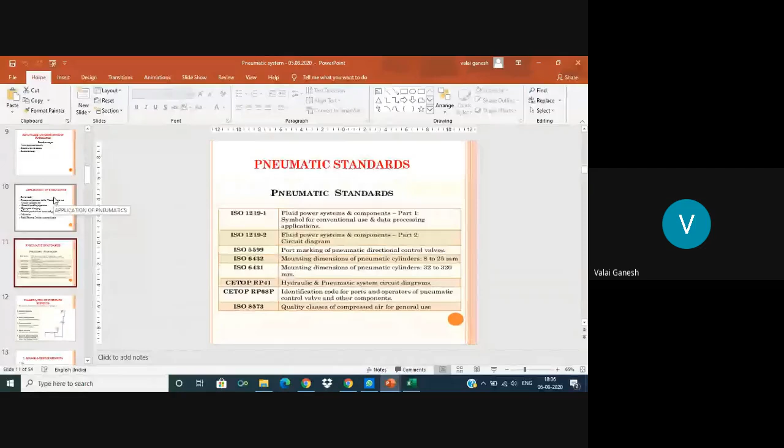So there are a lot of inherent advantages of hydraulics also. We can't simply compare pneumatics and hydraulics. There are a lot of parameters available. Based upon the parameters only, we can conclude which one is better. Okay. Since my topic is limited to pneumatics, I'm only focusing on pneumatics alone.

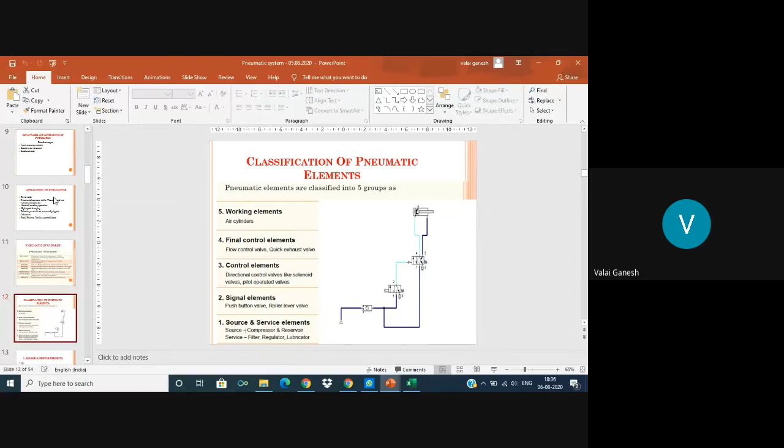To build any pneumatic circuit, these are the 5 basic components required. One is the source or service element. Source is nothing but air. Air is taken from the atmosphere, and that should be compressed properly in order to build some pressure. In order to compress the air, we require a compressor.

We can't directly send the air into our system because air is taken from the atmosphere. Sometimes it has some pollutant particles that should be removed properly. That action could be done with the help of a filter, and we are adjusting our pressure also by tuning the pressure with the help of a regulator.

And compressed air is sent to the system, where if pressure increases, temperature also indirectly increases. We don't require any hot air in our system. We require only pressurized air. For that, we use lubrication for minimizing the temperature in the system.

And the second one is the signal element. This is called the signal element: push button valve, roller lever valve. So this is the push button valve. Okay. And the third one is the control element. This is called a direction control valve. 3x2 direction control valve, and this is called a 4x2 direction control valve, where the activation is based upon pilot. Here the activation is based upon push button.

Okay. And the fourth, the final control valve, that is the flow control valve or quick exhaust valve, is not indicated in this picture. And the fifth one is the working element. Working element is nothing but our actuator. As far as pneumatics is concerned, in most cases the actuator may be a linear one. Linear means it will move left to right or top to bottom. Only straight action. There is no rotary motion involved in this.

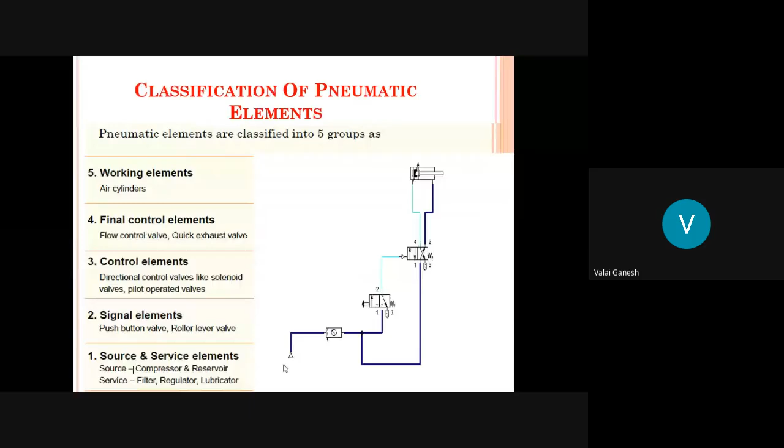The one and only difference is there we don't require a compressor. Instead of a compressor, we are going to place a pumping unit, pump with the motor setup, because oil is incompressible. There we are going to use liquid fluid; in most cases we are using oil. Oil is incompressible in nature, so we can't compress the oil. Instead of a compressor, we use a pumping unit, pump with the motor. Okay, so sir discussed all those things very clearly and precisely in the last class.

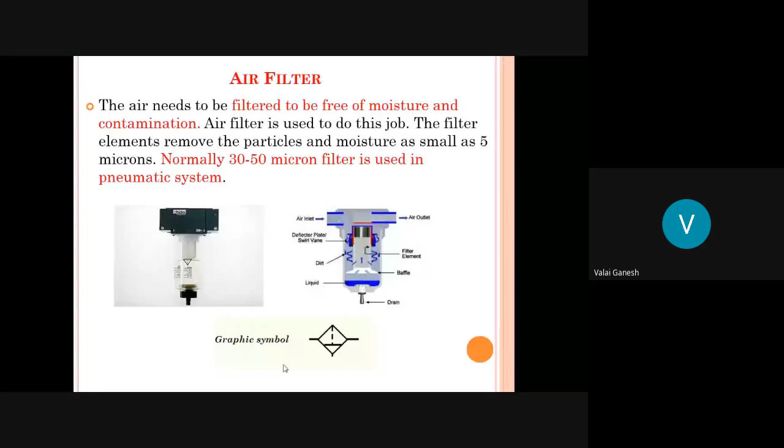The only takeaway from the last class, the one and only most important thing, is you need to know the symbol, the graphical representation of each and every symbol. Then only you will be able to do some kind of automation. These symbols are universally accepted. That means wherever you go, you may find the same symbol. There is no change as far as symbolic representation is concerned. Okay. These are all the various components along with the symbols.

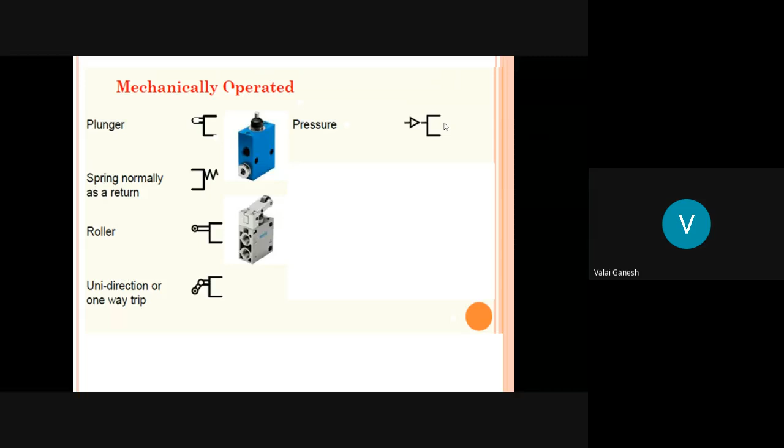Instead of manually operated, we have certain kinds of joints and linkages. So the first one is plunger, second one is spring return, third one is roller, fourth one is unidirectional or one-way trip. This is called idle return, roller with idle return. And this is the most important case for you. Whenever you find this triangle pointing towards the right hand side or left hand side direction, it is called a pilot signal. Pilot signal means air is used to change the direction of the direction control valve instead of a human.

This is solenoid direct and this is called solenoid pilot. Whenever you see that filled triangle, that refers to pilot. This is combined pilot as well as solenoid. Whenever you pass the air into the system, it will automatically change the direction. Or whenever you apply some current into the system, the valve direction also changes. The primary purpose of those terminologies is to change the direction of the direction control valve.

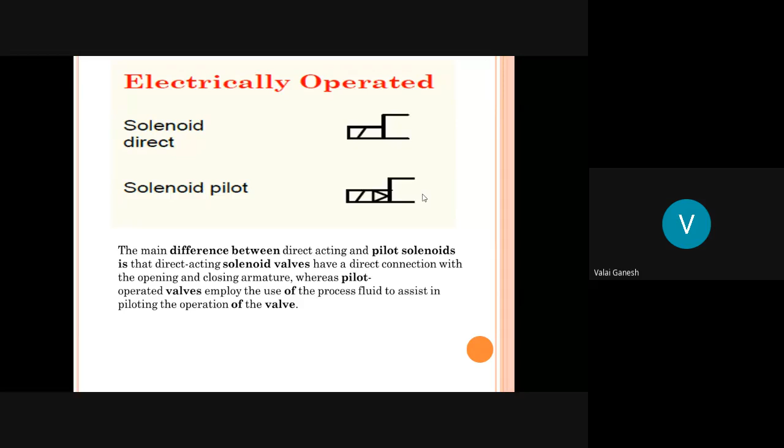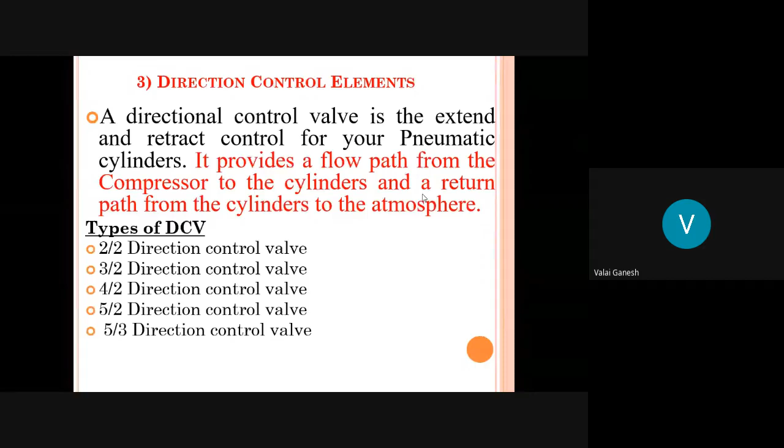Yes. So direction control valves are normally designated by these parameters. It looks like a fraction, with the numerator having one value and the denominator having one value. Normally the denominator represents the number of square boxes. So if it is 2 square boxes, it contains 2 positions. That is indicated at the denominator. Okay. The numerator has the number of ports.

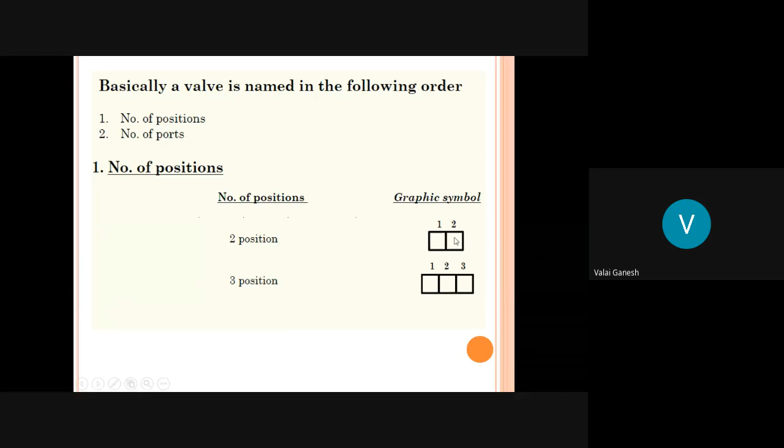Suppose you have 3 square boxes in your direction control valve, it contains 3 positions. One is for left side activation, another one is for right side activation, and the central one is for neutral position. Okay, so inside the square boxes you may have some ports, that is 1 to 2. This is the opening passage. So 1 to 2. So it is said to be a 2 by 1 direction control valve. Why is it called a 2 by 1 direction control valve?

It contains 2 ports. The ports are normally designated as the numerator of the valve, and the number of square brackets is designated as the denominator of the valve. Okay, this is a 2 by 1 direction control valve. It contains 2 ports and only one direction. Okay, so this is called 3 by 1. This is called 4 by 1. And this is called 5 by 1.

Whenever you find the symbol T, T stands for terminal, temporarily locked. We can't send the air further beyond this position. Okay. Yes. So with the help of this, we can designate this valve. This is called a 5x2 direction control valve. Why is it called a 5x2 direction control valve?

So it contains two square brackets, so the two is automatically designated as the denominator. In the numerator, it contains 5 ports. This is port number 1, this is port number 2, this is port number 3, this is port number 4, and this is port number 5. One square having 5 ports means similarly you get the same 5 ports on the other square bracket, but their positions are changed. Okay, in order to have different kinds of activation, the positions are changed. Okay.

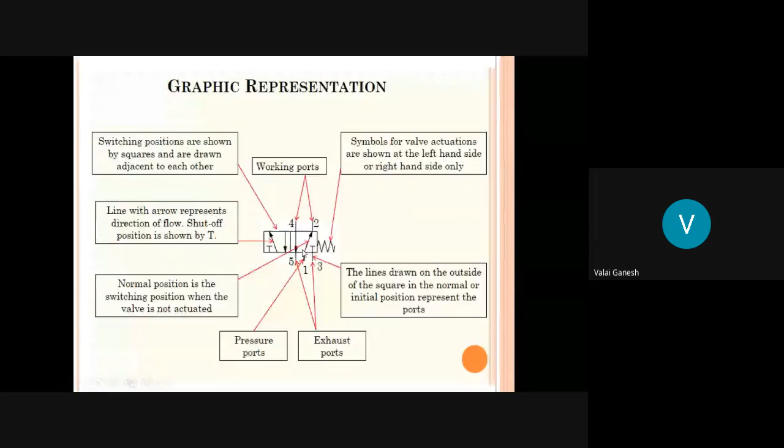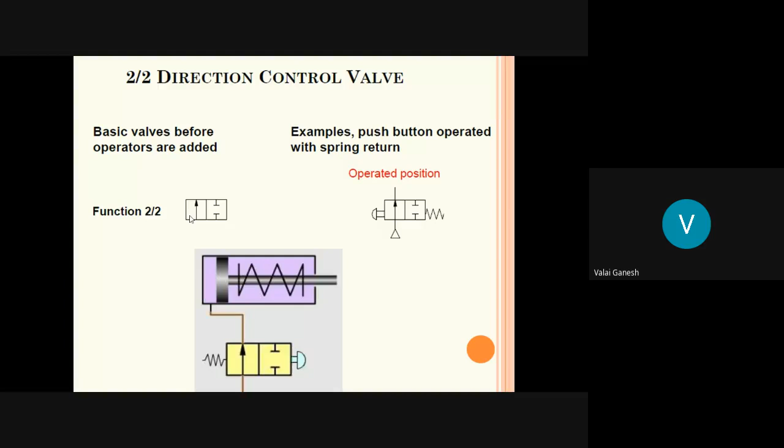So this is a 2x2 direction control valve. This is called a shut-off valve. Normally, it is called a shut-off valve. This is called a shut-off valve, where you can normally employ this kind of valve in your home, where taking liquid from the bottom, and you are going to take the liquid from the bottom position to the top position. You normally use this kind of valve. Okay.

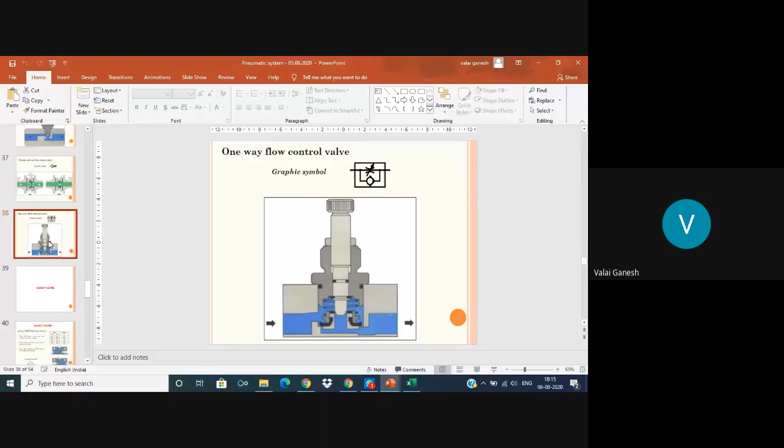Okay. So these are all the things already discussed in the last class. My intention is to explain those things only. Now I move on to today's presentation. Yesterday's presentation was only focusing on the pneumatic system, its components and ISO symbols.

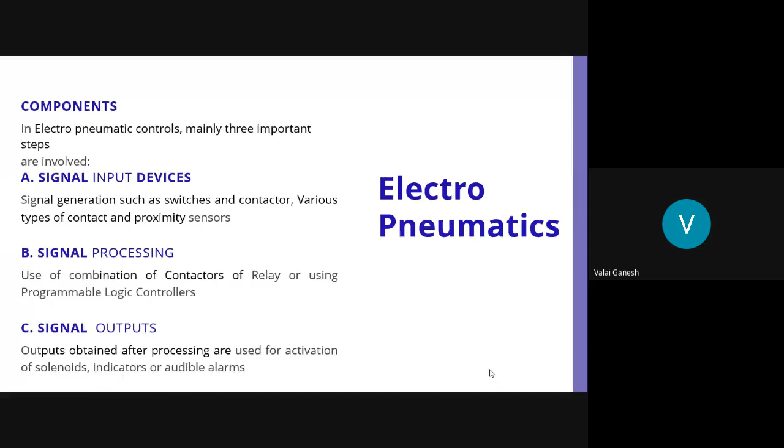Okay. And the third one is signal output. The output device may be a solenoid, or it may be an indicator, or it may be a buzzer or alarm. So these are the three main components of electro-pneumatics: input element, processing element, and output element. Okay. So in most cases, we are using these kinds of components in our system. The first one is manually activated push button switches. Manually activated push button switches, as the name suggests, work only with the help of human input.

If the switch is open, whenever you press the switch, it will be able to close, as you turn on or turn off the switch in your home application. The second one is called a limit switch.

As the name suggests, this limit switch is used to limit the displacement of the actuator. This limit switch is used to adjust the displacement of the actuator. The actuator may be a single acting cylinder or a double acting cylinder. For example, a double acting cylinder has a stroke length of 200 millimeter. That means whenever you supply air into the actuator, it tries to move 200 mm from its position.

In order to limit its position, for example, I require only 100 millimeter displacement. In that case, I'm going to place a limit switch so that the distance between the limit switch and the actuator is 100 mm, so that whenever my piston reaches 100 millimeter, this switch is able to give the alarm, or give the signal to proceed with further operation. So this is called a limit switch.

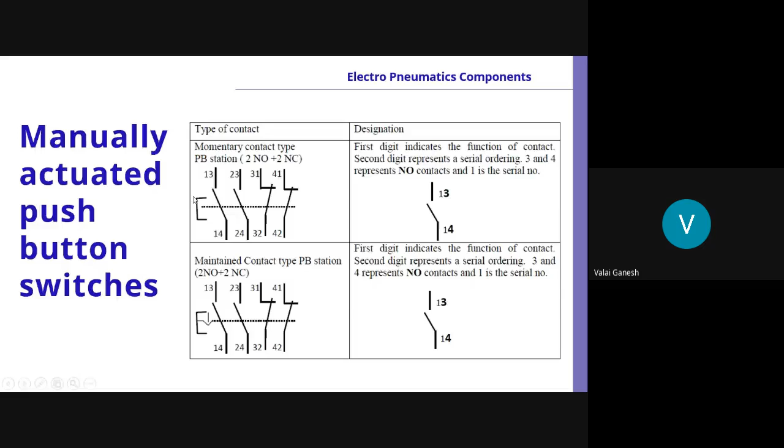So here the switch is open. Here you may see a certain clearance gap. Whenever I apply force in this direction, what will happen? This plunger will move downward, and contact from 13 to 14 will make. Whenever I press the switch, this switch is closed. As you can see, this is the activated position. Activated position is nothing but the output after giving the input. This, before giving the input, is called the normal position.

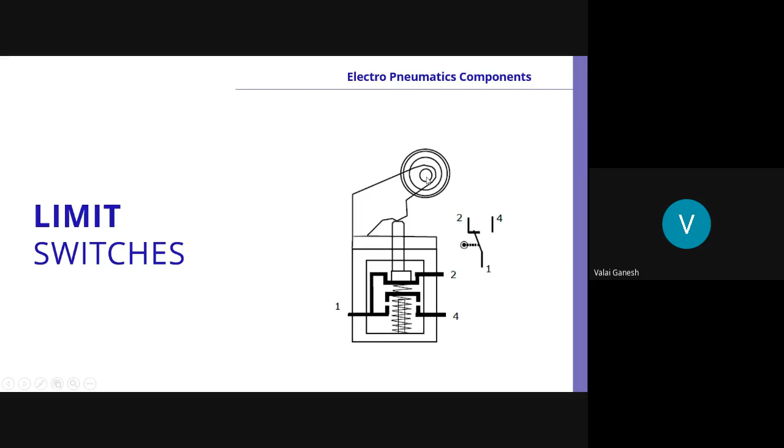Here the symbol is a little bit different, where you can see a circular portion instead of a partial rectangular portion. Here you see the partial rectangular portion; here you see a circular portion instead. Whenever you see this circular portion, it is a limit switch. Normally 1 to 2 is a normally closed contact, and 1 to 4 is an open contact. Whenever the limit switch is activated, the 1 to 4 contact makes and the 1 to 2 contact breaks.

Yeah, these are called relay switches. Relays are switches that open and close circuits electromechanically or electronically. Relays control one electrical circuit by opening and closing contacts in another circuit. Relays are electrical switches which we can't adjust by hand, as you can see in the manually operated push button switches.

Normally we deploy a relay to act as an intermediary, or to connect two different operating voltages. One basic example of a relay is wherever you find a stabilizer in your home applications, integrated with your television, refrigerator or air conditioner, where you may find a lot of relays inside the stabilizers. It acts as a bridge, used to connect two different operating voltages.

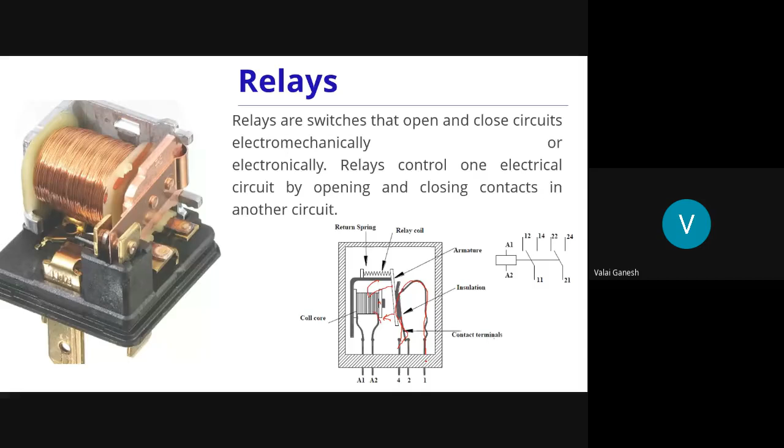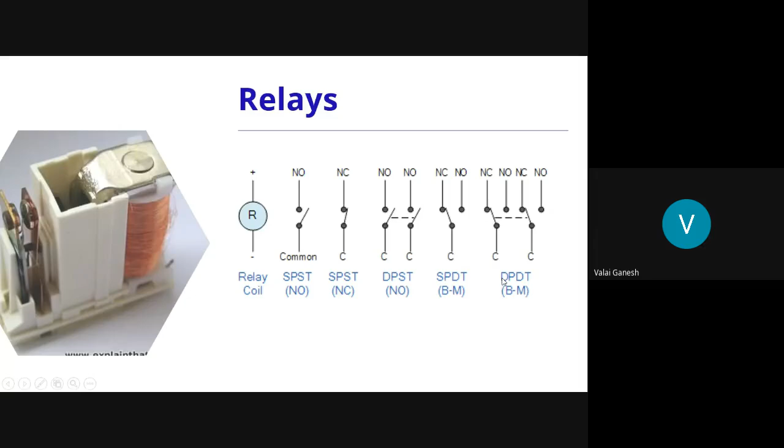So these are the various common types of relays. Single pole single throw, normally open, in the sense it is normally in the open position, and this one is in the closed position. NC means normally closed, NO means normally open. This is a double pole single throw switch, this is a single pole double throw switch, and this is a double pole double throw switch.

Yeah, this is the solenoid. The symbolic representation of a solenoid is a rectangle with a slanted line inside. A solenoid is an electromechanical device. Whenever you supply some current, it produces mechanical force as the output. With the help of this mechanical force, we change the direction of the direction control valve. So this is called a 3/2 direction control valve. Here it contains two different directions.

So this is direction number 1, and this is direction number 2. At any moment, the air will pass from any one of the directions. For example, air is flowing from the second direction. Suppose I wish to change the direction, that is, from direction number 2 to direction number 1.

What I'm going to do is simply apply some current into the solenoid, such that a mechanical force is developed. Now the air will flow from the first direction instead of the second direction. Whenever you remove the current, then due to spring actuation, direction 2 is normally changed instead of direction 1. So this is again a 3/2 direction control valve with pilot operation.

This is a 5/2 direction control valve. How is it designated? This is the first port, second port, third port, fourth port, and this is the fifth port. So totally 5 ports are available, and totally 2 square brackets are there. So it is called a 5/2 direction control valve.

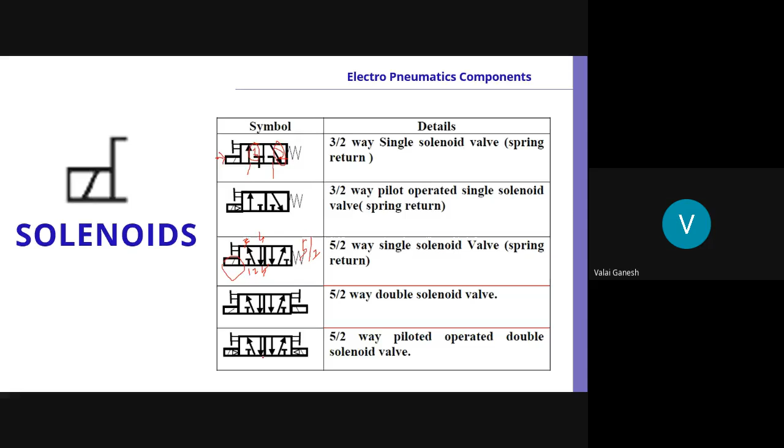Next we move on to the applications. So far we discussed what is meant by an electro-pneumatic system and the basic components involved, that is switches, relays, and solenoids. So a basic application is automatic opening and closing of doors in buses while stopping. And the next one is sequencing applications.

Sequence means order. In ordered applications, we may deploy this electro-pneumatic system. For example, in the case of a drilling or stamping operation, first we need to pick or hold the incoming material. That is the first operation. The second one is movement of the drill bit. And the third operation is placing the drill bit into our product.

The fourth one is returning the drill bit to its original position. The fifth one is unclamping our work pieces. So these are the sequence of operations in the drilling process. For this sequence of operations, we may deploy electro-pneumatics. And the next one is timing and counting operations.

As I already told earlier, in packaging, for a batch of packaging applications, we may set the timing as 5 minutes to complete 50 item packages. Once 50 is met and the 5 minutes time is also met, then one set of items has been packaged successfully.

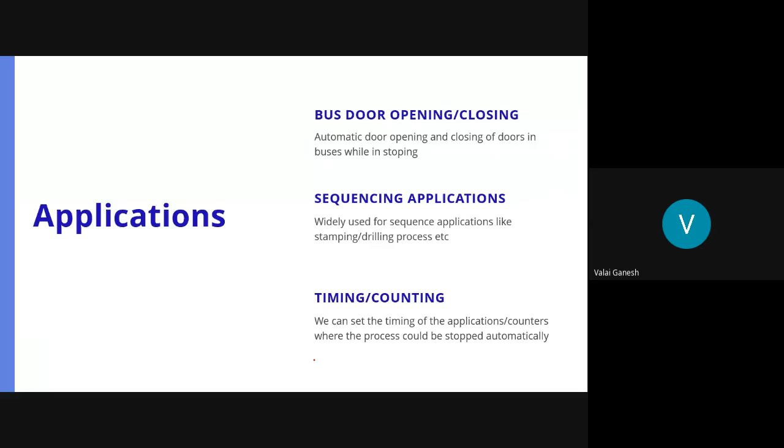So this is the basic pneumatic circuit, titled actuation of a single acting cylinder. For a beginner of any background, this is the first and foremost circuit. It is like knowing the letter A in pneumatics. If you are a beginner to the English language, first you need to study the alphabet, the various letters in the English language. Similarly, here it is the first, beginner level, entry level circuit.

So this is the normal position of the pneumatic circuit. This is the activated position of the pneumatic circuit. First, with the help of these symbols, we need to know all the components. You need to know the name of each component. Whenever you find a triangle like this, it is called a compressor. Unfilled triangle, compressor. Filled triangle, it is called a motor.

Suppose a triangle looks like this, that is, the inverted triangle of the above picture, it is called a vent. Vent means exit. This is called a compressor. So whenever a triangle looks like this, it is called a compressor, and this is called a vent. And again, when the triangle looks like this, this is called a pilot.

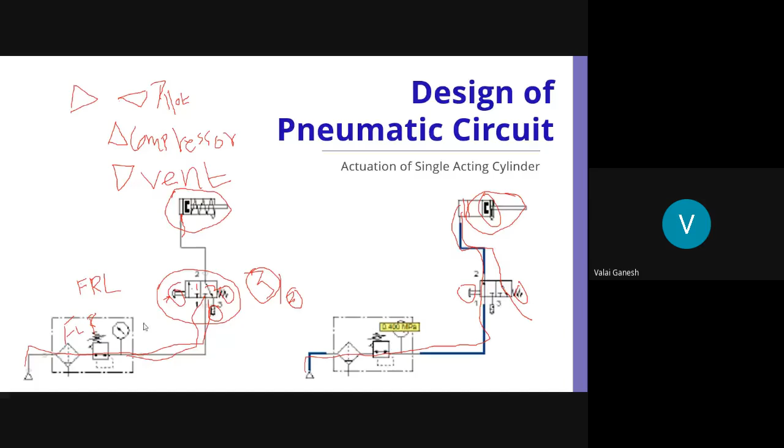So the same can be explained with electro-pneumatics also. In electro-pneumatics, the components are simple. This is a single acting cylinder. This is a 3/2 direction control valve. Instead of manual operation like a push button, I am going to place a solenoid coil. If it is on one side of actuation, this is called a single solenoid valve.

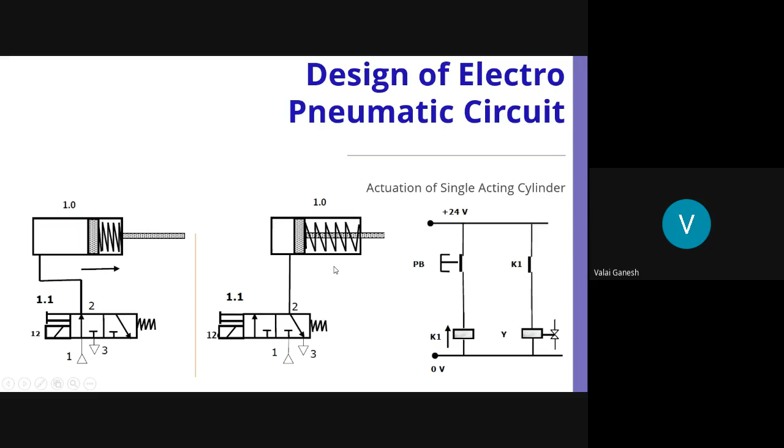Suppose a solenoid is present on both sides of the direction control valve, it is called a double solenoid actuated valve. The equivalent electrical circuit I need to draw separately. Whenever I give some input in this direction, I will get the output. I will draw the same circuit in the software named FluidSIM, which is a licensed version, and we can't give this software to all.

So whenever you open FluidSIM, this is the home page. Suppose you wish to create a new circuit, simply press new, where you can see a white screen. Inside the white screen, you have one boundary which is filled with black color.

Okay, this means this is the end limit of the circuit. Whenever you draw beyond this limit, those parts are not taken for the simulation. Your boundary limit is from this area to this black line only. Inside this boundary only you are going to draw the elements, and simulation can only happen inside the boundary. So I am going to minimize.

I am going to set the boundary level. Now I am going to place. In the library you may find a lot of components. Here is the pneumatic component. If you expand the pneumatic, you may see supply elements, actuators, valve group, measuring instruments or sensors. First and foremost, to create any kind of pneumatic circuit, you require a supply element. The supply element is called a compressor. Next I am going to place an air service unit. Air service unit means it consists of filter, regulator, and lubricator.

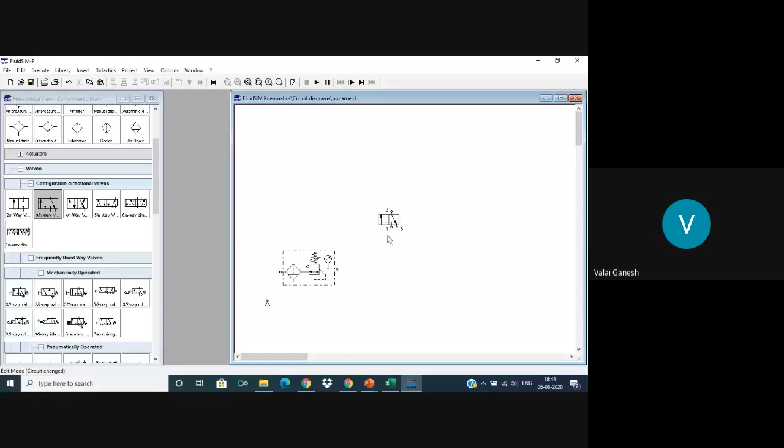Now I'm going to place the actuator. So how to place the actuator? I'm going to find it. Yes, actuator is here. Inside the actuator, you may find a single acting cylinder. Just pick and place. No need to draw anything. All the standard components are represented in the form of their diagram or symbol. You need to find those symbols by their respective names and just pick and place. That is enough for you.

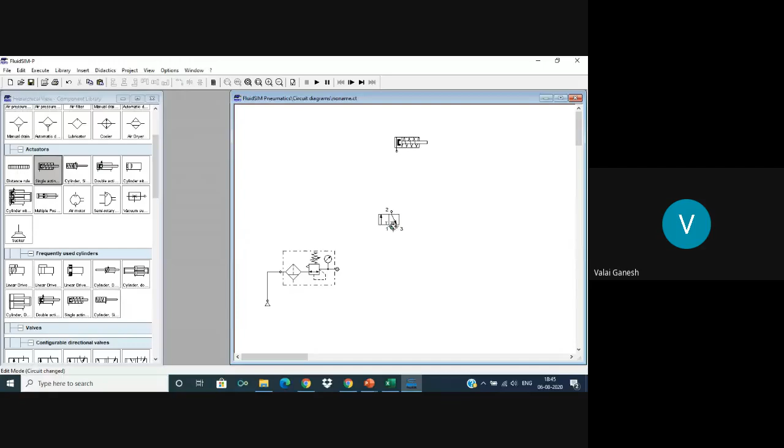So I'm going to give the connection. Whenever you place the cursor in front of each component, you may find a target symbol. This is normally the connection we have to give. I'm going to press in this area and drag in this direction, and release my mouse button on the next position. Similarly I'm going to connect this to this. Normally number 3 and number 5 are meant for the silencer. I'm going to double tap at number 3 and open a silencer.

So this is a simple 3x2 direction control valve. Here I need to define what kind of activation it is. Now direction 2 is connected. I wish to change the direction, that is 2 to 1, so I'm going to define it. I'm going to double tap this. In the left side portion, you may find manually. Here I'm going to use manual operation. This is called a push button. There are a lot of other manual operations also available. This is manually, and on the right hand side you may find spring.

So this is the first and foremost circuit for you. Now I'm going to press the play button. Air flow is indicated by the dark blue color, or it may look like violet to you. The normal line is indicated by the sky blue color, meaning air is not flowing in this portion. Air flows from compressor to FRL via this direction. This is the locked position, so air is not able to move further beyond this valve.

In order to supply air into the actuator, I am going to simply press this button. Whenever I press the button, the first square bracket engages, allowing air from bottom to top, so my piston will be able to extend. With the help of this extension, we can do a lot of operations. You can connect this piston to your bus door, and your door will open automatically. Door opening and closing is normally controlled by the driver alone.

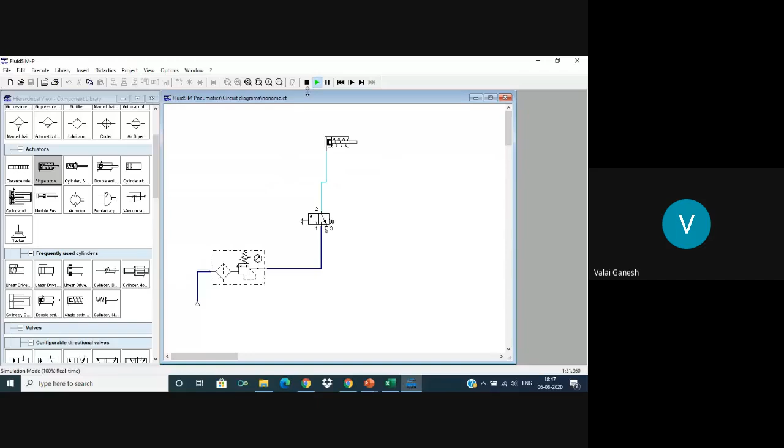Okay, so this is called activation of a single acting cylinder using a 3x2 direction control valve. Suppose I am going to add some electrical component; the one and only thing is I am going to replace it. I'm going to double tap this. Instead of manual operation, I'm going to do electrical operation. Okay, this is called a solenoid. Whenever you give some current, this direction will automatically change, instead of mechanical activation or manual activation.

Okay, for this I need to draw some electrical circuits. Those circuits are very easy for you. As far as this software is concerned, it is operating on 24 and 0 volts only. The positive supply is 24 and the ground connection is 0 volts. So in between this, we are going to draw the electrical operation. In the switches menu, you can find manual operated and general switches. General switches are called relay switches, and for manually operated switches, a lot of varieties are available.

Okay, I'm going to place the first switch. This is called an open switch. As you can see in this diagram, 3 and 4 are open. Whenever I press this button, 3 and 4 get closed. Okay, now I am going to connect this solenoid directly. So I'm going to connect 24 volts to the third contact, and the fourth contact to the solenoid. The other end of the solenoid I'm going to connect to 0 volts.

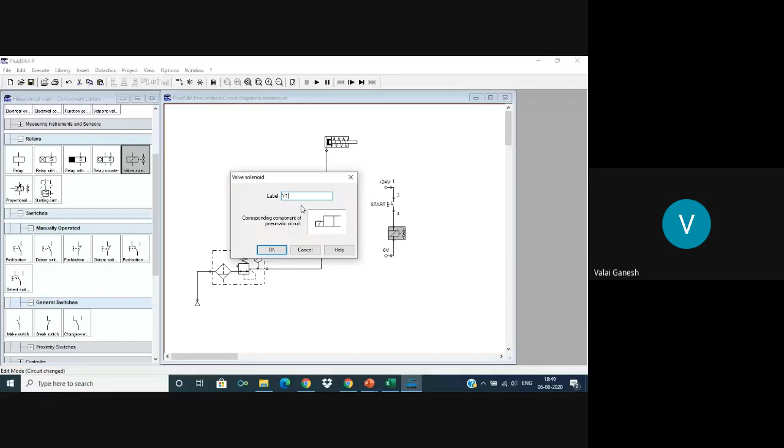Now I'm going to name the switch. So I'm going to double tap this. This is called a start switch. I'm going to double tap this. This is called solenoid 1. Most German conventions represent solenoids by Y. If you have multiple solenoids, they normally designate them as Y1, Y2 up to YN. Okay. And similarly, I'm going to pair this. How to pair this? I simply double tap this and give the same name you gave in this area.

Okay. So what will happen now? I'm going to play the simulation. Air is flowing to the second position of this direction control valve. There is no outflow of air since the valve is closed in the second position. If I wish to give air in this direction, the piston will extend. In order to change from the second position to the first position, here a solenoid is deployed. In the last case, a push button was employed, so that if you press the push button, it automatically changes. Now I am going to activate the solenoid. Solenoid means input is electrical current, output is mechanical force. With the help of force, the direction is automatically changed.

Now I am going to press the button here. What will happen if I press the button? This contact is automatically closed. This contact closed means 24 volt current is directly sent to the solenoid. Now it gets energized and the air will flow in the right side direction. So this is the same thing. Earlier I explained only with the pneumatic component. Now I'm integrating an electrical component instead of the pneumatic one.

Okay. So whenever I press the switch, it will extend. If I release the switch, it will come back to its original position automatically. Whenever I release the button, current won't flow into the solenoid, so it won't give any force, and with the help of spring activation, number 2 position is automatically enabled.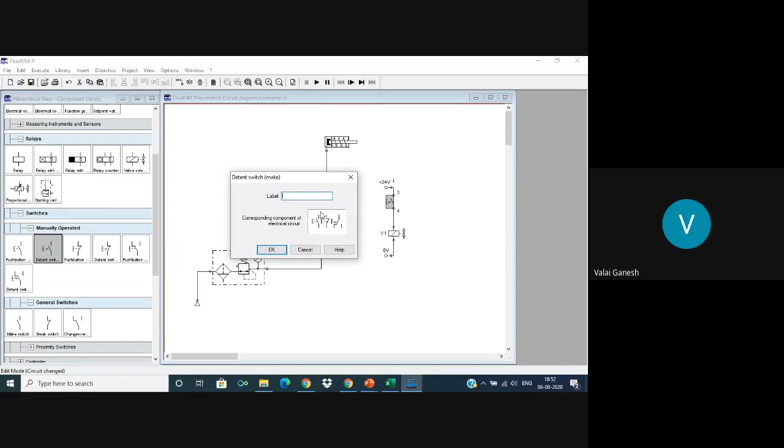This is a permanent switch, I think. Okay. So I press the button, meaning it is in closed condition, even though I release the input from my mouse. Okay. Whenever I try to press the button for the second time, it will open. Okay. So this is the difference between the push button switch and the detent switch.

The detent switch permanently stays in its position, and the spring return switch means whenever you give the input, it will elongate. Whenever you remove the input, it will come back to its original position. As you can see in calling bell switches, most homes are employed with calling bells. Calling bell switches are spring return switches. So that is the first case.

This is the second case, the detent switch. This is typically used in many home actuations, like turning on the light, turning on the fan. Whenever you press the button, your light will glow instantly, your fan will rotate instantly for a period of time. Suppose I wish to turn off the light or the fan, I press the switch again, so that it will come back to its original position.

So this is the beginner level, basic level, or entry level circuit for you. We can do a lot of logical operations one by one. That is, we can deploy AND operation, OR operation, NOT operation. We studied only logical elements. There are a lot of inherent portions also there. Okay, so this is the first and primary thing I wish to teach.

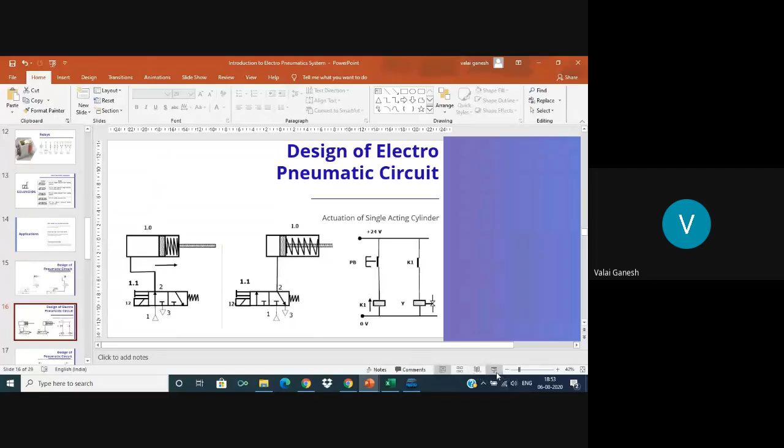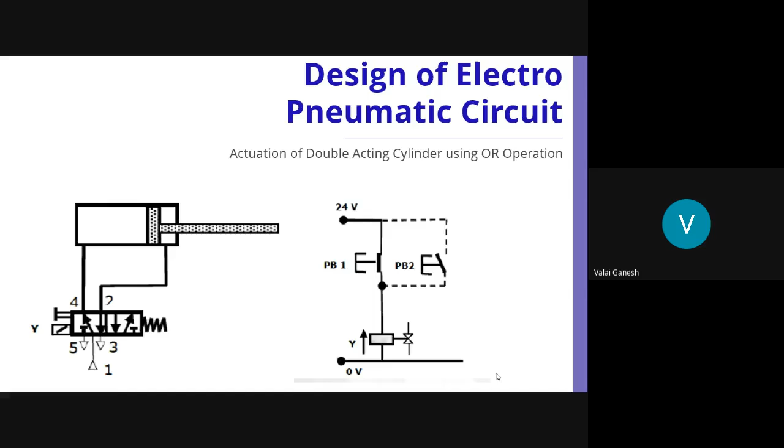The same thing, this is the AND gate. With the help of the AND gate, we are going to perform some operations in pneumatic as well as electro-pneumatic. This is the OR gate application. Based upon the logic truth table, we may be able to do the same operation. This portion, don't worry about it. I will clearly explain it in tomorrow's class, because the time is limited, almost 5 minutes remaining, so I need to move on to another topic. So some case studies are also available.

Here you can do some electrical circuits. Here is the mechanical portion. You need to build the equivalent pneumatic electrical circuit. Okay. So here a single solenoid valve is used to operate a double acting cylinder. Why is it named a double acting cylinder? Here you have two inputs instead of a single input. If it is a single input, it is called a single acting cylinder. If there are two inputs available in the cylinder, it is called a double acting cylinder.

Okay. The cylinder moves in the forward direction when the push button is pressed. Whenever I press the push button, the cylinder will move forward. Forward means towards the right side direction. The cylinder retracts when the push button is released. Whenever I remove the push button, it will come back to its original position.

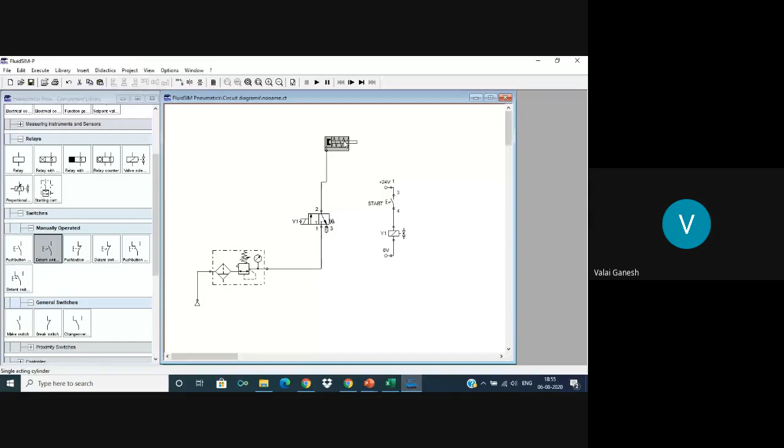How to draw this? Instead of a single acting cylinder, I am going to place a double acting cylinder. Where can I find it? In the actuators menu. So this is a double acting cylinder. It contains two inputs, but this direction controller contains only one output, that is the 3x2 direction controller. So we can't proceed with the 3x2 control valve. I am going to use 4x2 or 5x2 depending upon my application.

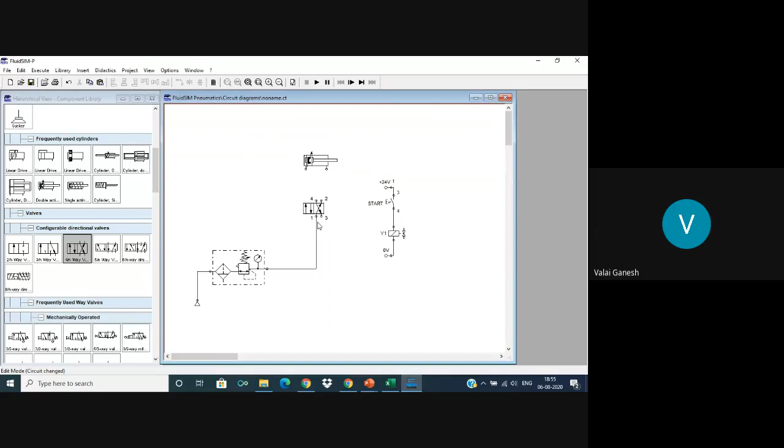Each and every number has its own designation. Number one is for input, number three is for output or silencer. Number 2 and number 4 are called working elements, where you can connect directly to the actuator. Okay, I'm going to double tap this and give the connection to the silencer. Only one solenoid is employed here. The other end is spring return. Okay, I'm going to name it Y1.

I'm going to simply play this operation. What will happen? Air flows into the second portion. The second portion looks crossed instead of straight. So air flows into this portion so that your piston is on the left side. Okay. What will happen if I send air in the straight direction? My piston will start to move in the right side direction.

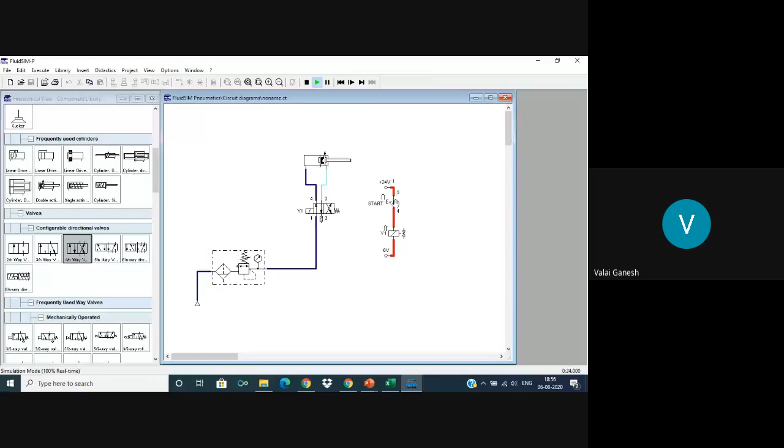Okay. So that could be done with the help of this. Whenever I release the push button, it will come back to its original position. So this is the equivalent circuit for case study number 1. Okay, bus door opening and closing I already showed.

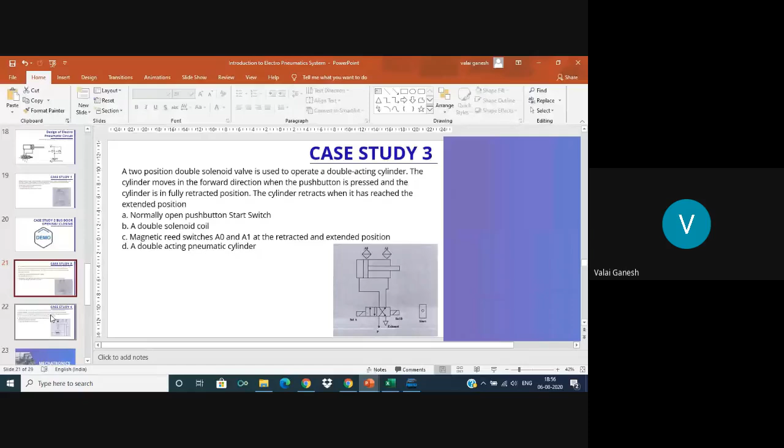Similarly, here instead of a single solenoid coil, you are having a double solenoid. Okay, we will try this whenever time permits. So I will conclude today's session with this slide. Or probably I will explain the mechatronic skills concept in the next session.

In drilling or stamping operations, we employ the concept called an AND gate. AND gate means only if both inputs are true will you get the output. Similarly, in a drilling operation, if the operator uses a single button for actuation, sometimes he may forget to keep the other hand safe. He may place one hand on the drill bit and one hand on the push button. Whenever he presses the push button, the drill bit starts rotating, and his hand may be damaged.

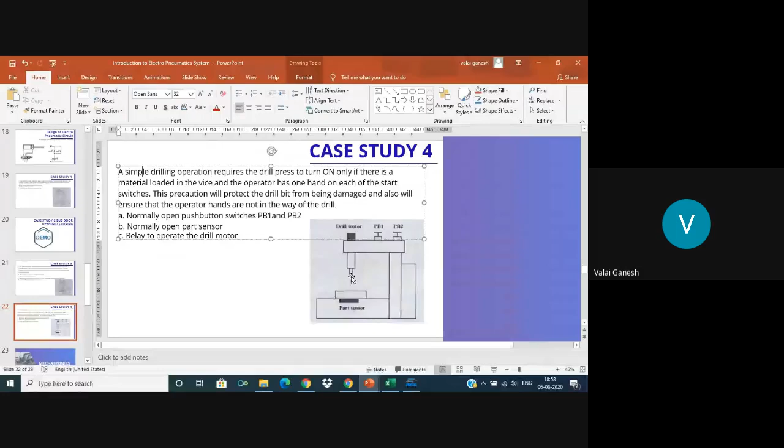To avoid those kinds of damages, for operating in these dangerous situations, both hands of the operator are employed. They use two push buttons instead of a single push button. The equivalent circuit for this case is a minor modification only. I'm going to add one more push button.

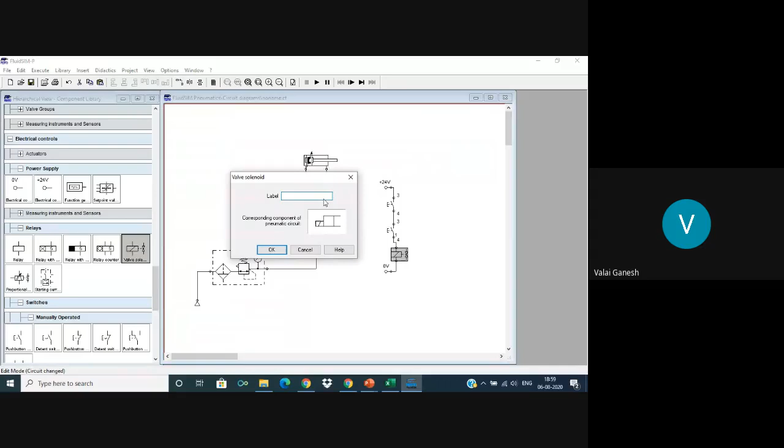So this is also a push button. I'm going to place a solenoid at the output of the push buttons. So this is Y1. This is PB1, as mentioned in the slide. This is PB2. So suppose the operator uses only one hand, then there is no extension of the drill bit. Extension of the drill bit is deployed at the rod end portion, let us assume like that. Suppose the operator presses only the other switch, the drill bit won't move.

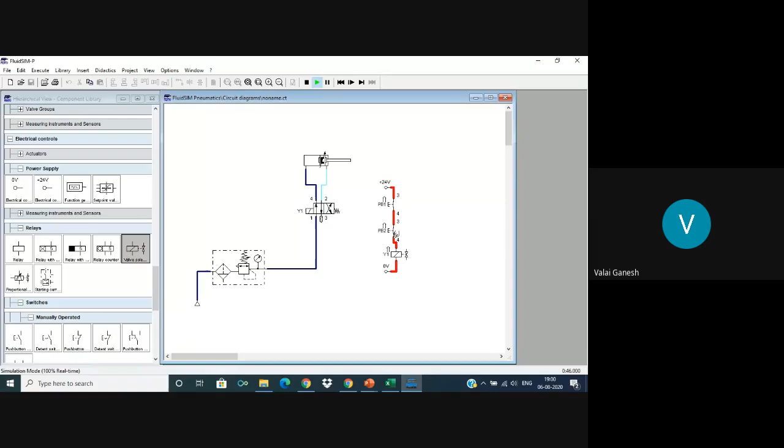How will the drill bit move? The operator presses the two buttons simultaneously. Only when he uses both hands on both switches will the drill bit be able to move, so that hand injury may be avoided. This is technically called an AND operation or AND logic operation. Similarly, every logic gate like OR, NOT, XOR, XNOR, NAND, NOR has its inherent applications in various domains. So this is the drill bit case for you.

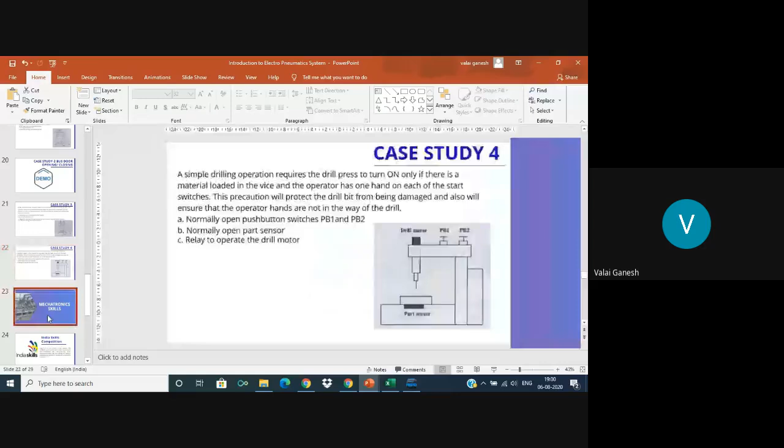So time is almost 7. I left only one topic, mechatronic skills, about awareness of the mechatronic skills competition. That will be discussed in the next class. If you have any doubt right now about these topics, you may ask. So this is tomorrow's agenda. Tomorrow's schedule is also programmable logic controllers.

We need to learn one software named Codesys, which is freeware software; I will share the link. If possible, you can download it and install it on your laptop or desktop. Codesys is freeware, but FluidSim is a licensed version, which I can't share. So this is a ladder diagram. With Codesys software, we have a lot of programming options, and one is ladder programming, which we will do in the next class. And we are doing some real-time applications also.